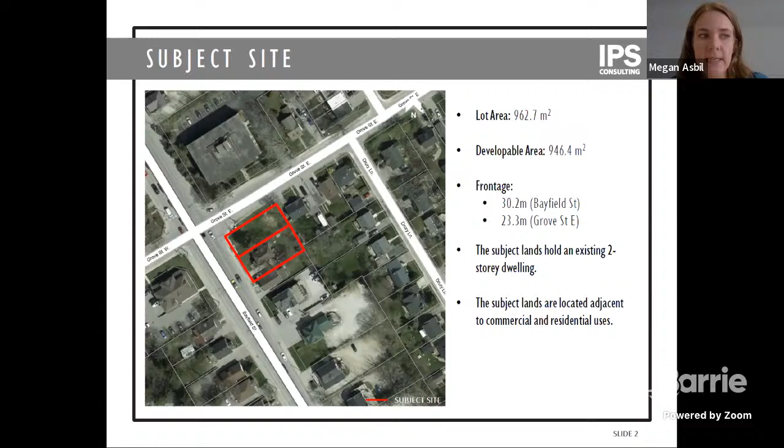233 Bayfield Street is vacant, and 219 Bayfield contains an existing two-story single detached dwelling, which is proposed to be maintained and converted for commercial use. The land slopes from north to south and contains vegetation throughout, but generally towards the east property line.

The subject lands are designated city center in the city's official plan. 233 Bayfield is currently zoned Transition Center Commercial SP-57, while 219 Bayfield is zoned Residential Multiple Dwelling Second Density in the city's zoning bylaw.

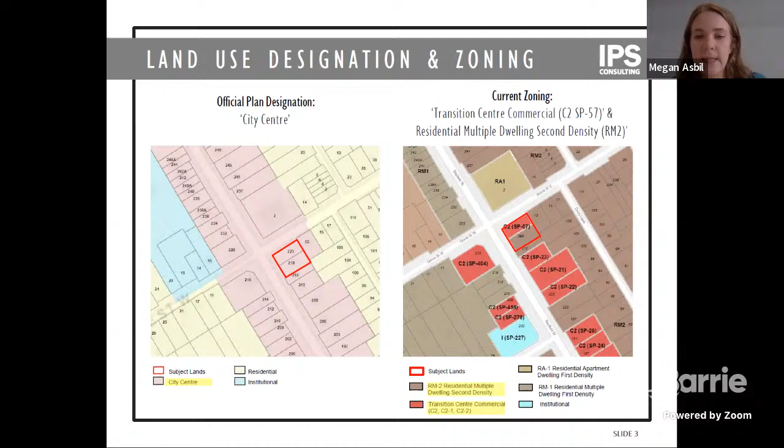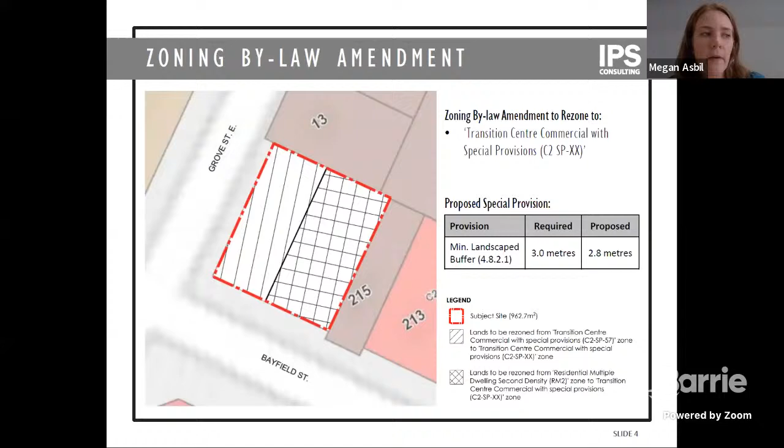The image shows the proposed zoning amendment. The proposal seeks to rezone the entire land holdings to Transition Center Commercial with Special Provision Zone, to permit conversion of the existing dwelling to commercial use as a real estate office. The special provision proposed is for a reduced minimum landscape buffer adjacent to a residential zone of 2.8 meters where 3 meters is required.

As a result of the required parking and access location, the landscape buffer along the east property is reduced to a minimum of 2.8 meters where 3 meters is required. The reduced landscape buffer is a result of our intention to maximize the distance of the entrance from Bayfield Street.

A neighborhood meeting was held on May 4th, 2021, with 9 members of the public in attendance. At the time of the neighborhood meeting, parking was proposed to the rear of the building, and parking has since been moved to the side and along Grove Street as a result of engineering considerations to provide for adequate stormwater management. During the neighborhood meeting, major items identified were related to traffic and the intended use.

A traffic impact study has since been submitted and is with the city for review, and it addresses any traffic concerns. The intended use is for a real estate office. Additional reports and studies were also submitted in support of this application, which include the traffic impact study, a tree preservation plan, a functional servicing report, and a planning justification report.

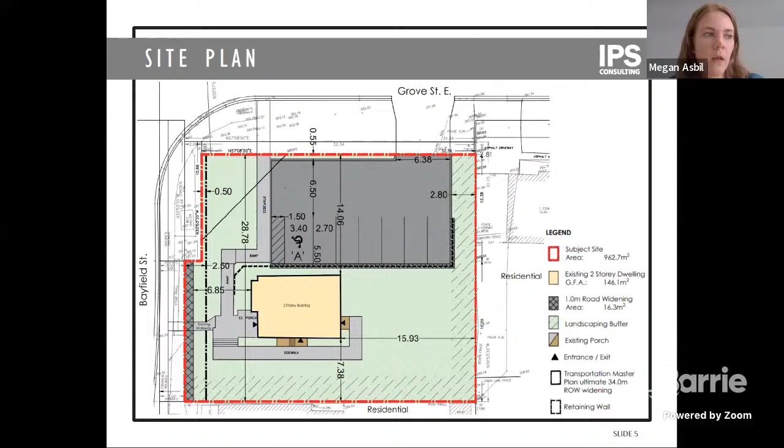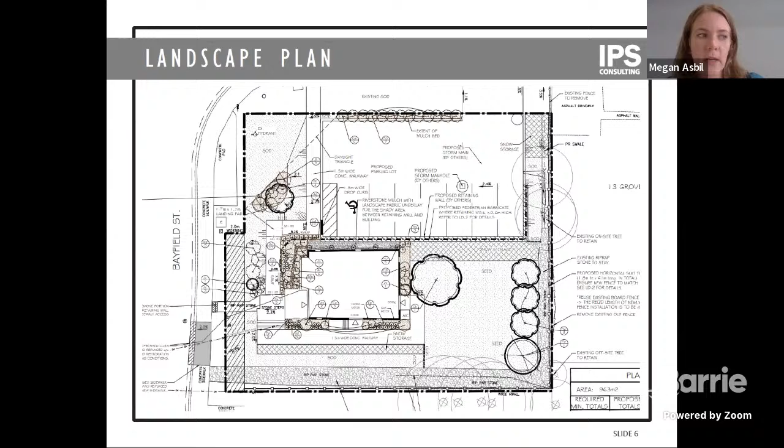This slide shows a proposed landscape plan. Additional tree plantings and vegetation have been added to the site to enhance the existing landscape elements and to contribute to the buffer between adjacent residential uses. The plan also provides a conceptual snow storage area and accommodates the required daylighting triangle at Bayfield and Grove Street.

In conclusion, the proposal will facilitate the adaptive reuse of the existing dwelling to a commercial use in the form of a real estate office. The proposed rezoning to Transition Center Commercial reflects a city center designation and the neighboring Transition Center Commercial zones. The proposed application aligns and conforms with the provincial policies on land use patterns and further conforms with the policies of the City of Barrie official plan. It is our opinion that the proposed application represents good planning and is in the public interest.

This concludes my presentation. I'd be happy to take any questions and hear any comments at this time. Thank you.

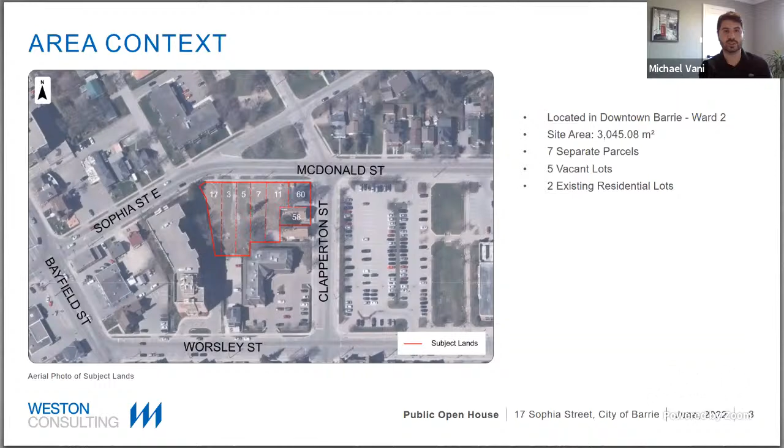So the site is located at the southwest corner of Clapperton and McDonald Street. It consists of 7 parcels currently - you can see them on the screen: 17 Sophia, 3 to 11 McDonald, and 58 and 60 Clapperton. The 2 parcels along Clapperton consist of existing residential lots, while 17 Sophia and 3 to 11 McDonald are currently vacant. The site is located within the downtown area, and it's separated from the stable residential areas to the north by Lions Park and the configuration of the McDonald and Sophia intersections here.

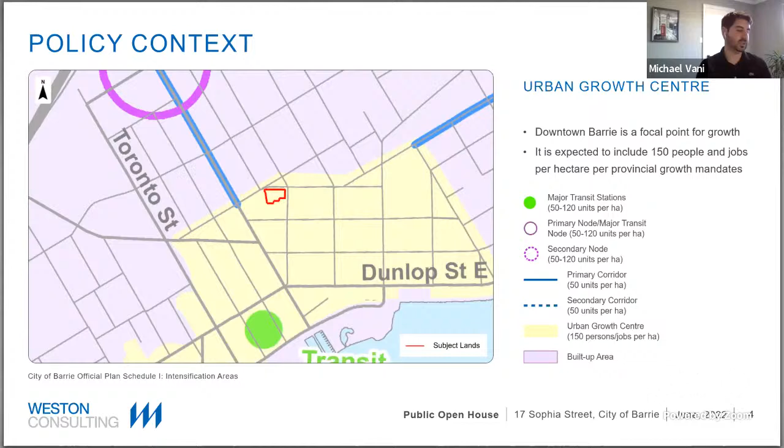So the site is located within the urban growth center, more commonly referred to as the downtown Barrie area, which mandates densities of 150 persons and jobs per hectare per the provincial growth plan policies. The City of Barrie official plan presently in force designates the site as city center. This designation generally permits a range and mix of uses, mostly in a combination of medium to high density built forms, and is expected to accommodate the greatest heights and densities in the city. The official plan provides the overarching land use vision for the city, and the development proposal currently conforms to the Barrie official plan.

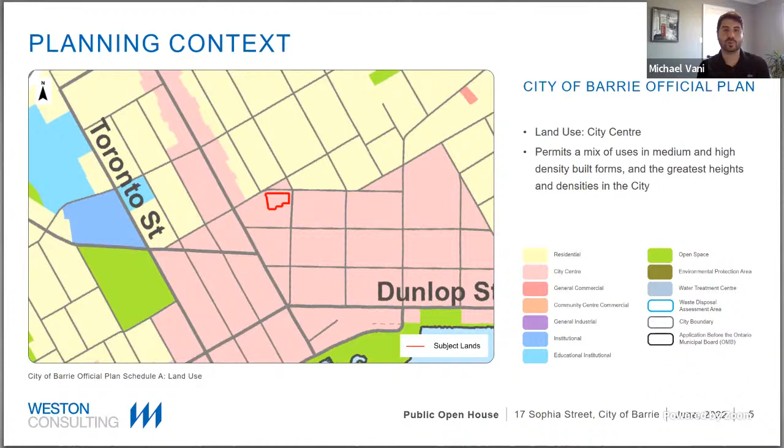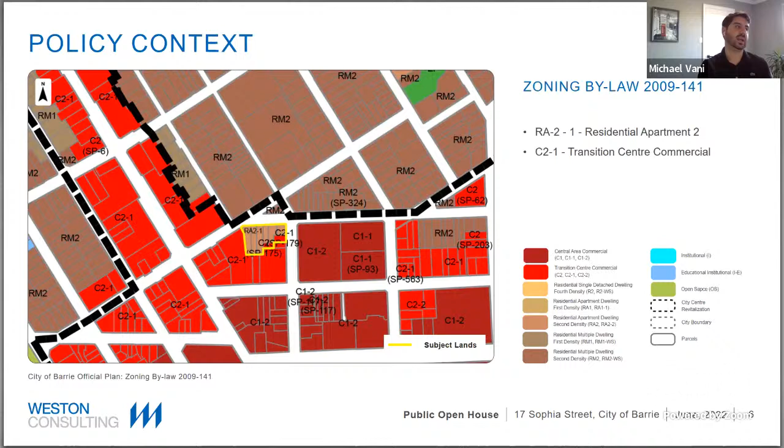With respect to the zoning, the city's zoning bylaw zones the site as RA2-1, residential apartment 2, and C2-1, the transition center commercial zone. The transition center commercial zone also applies to 58 Clapperton and the southern portions of 7 and 11 McDonald, as you can see on the graphic here.

So now I guess the good stuff, the development proposal before you. The applications propose a 21-story mixed-use building, which will consist of 253 residential units, 2,761 square meter commercial space at the ground floor, adjacent to the Clapperton and McDonald intersection.

The building facade will be designed to include a mix of glass, stone, and masonry materials. The masonry is predominantly proposed for the 4-story podium, and that's to distinguish it from the tower above.

The range of unit sizes and types are also proposed within the building to diversify the housing opportunities in the area and increase the overall housing supply for a range of family types. The building includes a mix of bachelors, 1 beds plus dens, 2 beds plus dens, and 3-bedroom units, so a wide range of units that generally fall within a 650 to 700 square foot range overall, on an average basis.

The development also includes a parking supply of 216 spaces, which is currently at a ratio of 0.85 spaces per unit, and that's proposed to be located within 3 levels of underground parking, as well as some vehicle parking at grade that is screened along the western portion of the site.

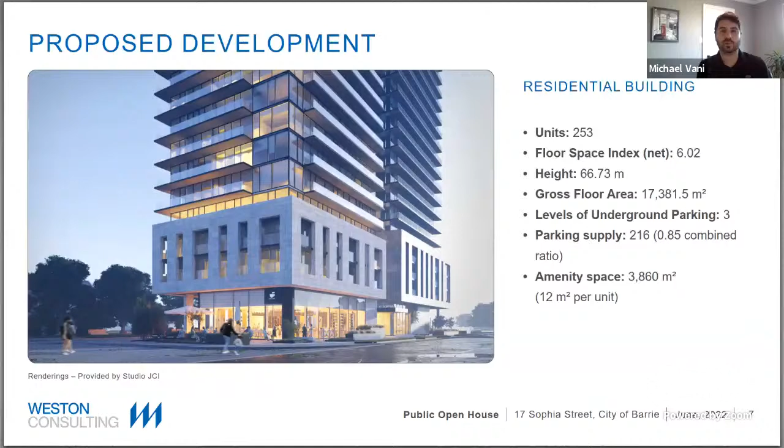In addition to that, there's also 12 square meters per unit of amenity space, which comes out to a little over 3,800 square meters overall of amenity space within the entire site, and an overall floor space index of 6.02.

So on the screen before you is the site plan, but more specifically, it is the ground floor portion of the site plan, just to give you a little bit more of an idea as to how the building will function. The access to the site has been proposed to be off of Clapperton Street based on direction from city staff and through various discussions that happened prior to the application being submitted.

This access is to provide more safety along Sophia and McDonald, and as well provides better traffic flow within the downtown area. The access off of Clapperton leads internal to the site, where there are some barrier-free and visitor parking spaces at grade, as well as an underground parking ramp that leads to 3 levels of underground parking.

There's also a loading space at the rear of the building. On the site, there are two main entrances to the building, one being off of Sophia and McDonald to increase the streetscape presence of the building and animate that streetscape in public realm.

There's also another access at the rear for more of a functionality purpose for those that are parking or visiting the site, as well as for drop-offs.

The building does include various amenities at grade, as well as commercial space that is proposed along the McDonald and Clapperton frontages, as well as approximately 170 square meters of outdoor amenity and urban square that is proposed at the corner of Clapperton and McDonald.

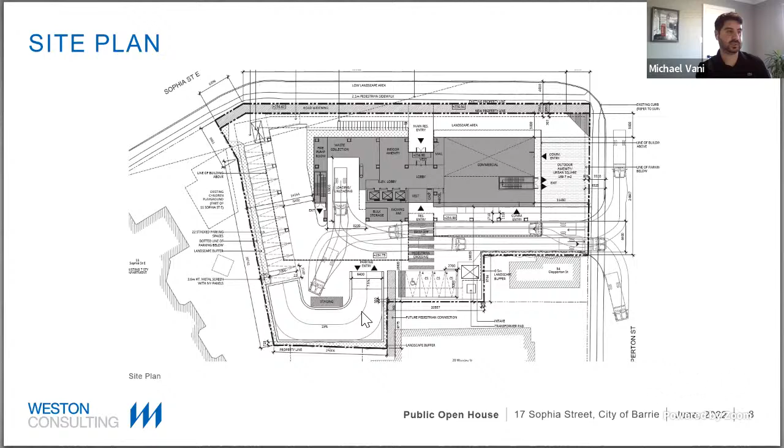So on the screen right now are a few conceptual renderings of the public square and open space that's proposed at the corner. Through the design process and in consultation with city staff, we saw the potential of a great community benefit here and a bit of a gateway feature into the downtown area.

As part of the development application, we are proposing the 170 square meters of urban square that will be open to the public but privately owned. We are excited about this feature and see it as a gathering place, not only for the community, but for the future residents of the building.

The rendering shown are preliminary, but we envision the space to include various street amenities such as bike parking, benches, tables, as well as extensive landscape treatments. The primary entrance to the commercial space is also located off of the urban square, which we believe will assist in animating and activating the space, as well as providing a great opportunity for that commercial viability of that unit.

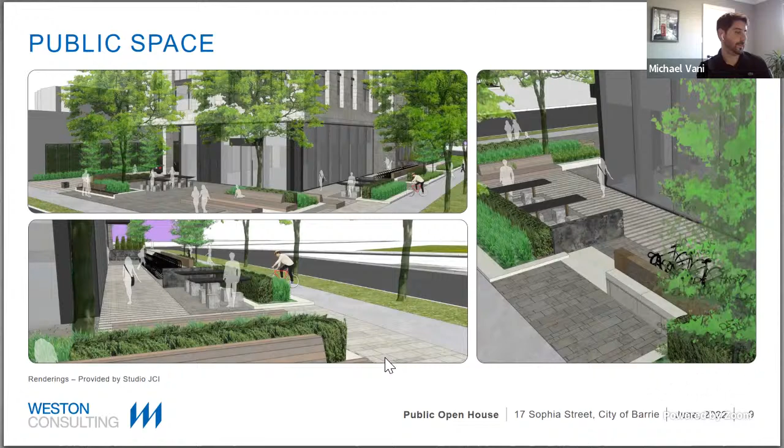Now on the screen is a bit more of articulation around other aspects of the building and some of the landscape and streetscape improvements that the plan hopes to bring. In addition to the public square, the team has put a lot of thought into the overall streetscape plan and the vision for the public realm.

Generous plantings and landscape elements are proposed to animate the streetscape and improve the pedestrian experience along Clapperton, as well as on McDonald and Sophia. As I said previously, the main building entry is also located off of Sophia and McDonald to further animate that streetscape.

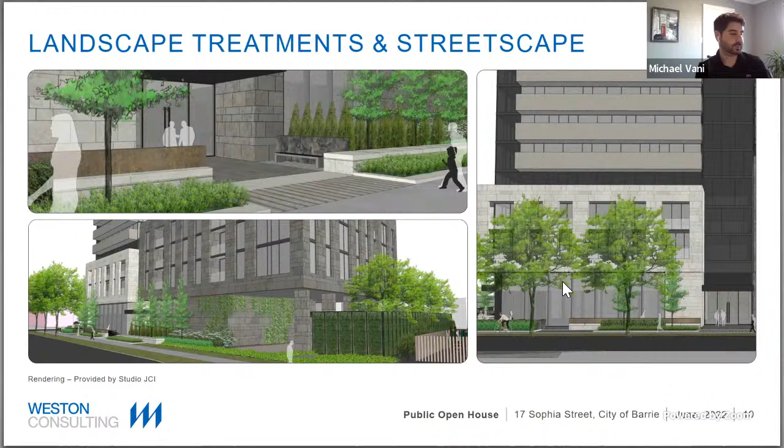The application before you this evening seeks to amend the existing transition center commercial zoning and apply it to the entirety of the lands with site-specific provisions. This is to implement the development application as currently proposed. There are a number of site-specific provisions that will need to be implemented through that process, such as reductions in the side yard setback, increases to the building height and gross density, a slight reduction in the parking requirement, and a reduction in the overall commercial ratio to the ultimate GFA. We are still awaiting feedback from zoning staff and will continue to refine this list of amendments as we proceed through the application process.

In terms of next steps, we have already had a public open house prior to the submission of our application, where we received a lot of positive feedback from the community, which we are still considering in our refinements to this plan. We wish to hear some additional feedback this evening from council, as well as from any members of the public in attendance, to take that back and consider further refinements to our plan. We are still awaiting a number of comments from city departments and external agencies, and we'll be reviewing any comments we receive tonight against those to potentially make further refinements and address all issues so the application can be brought forward to this committee for further consideration in the future.

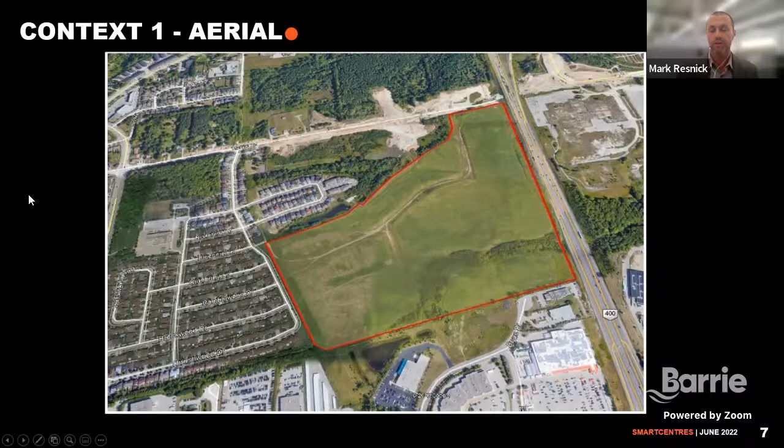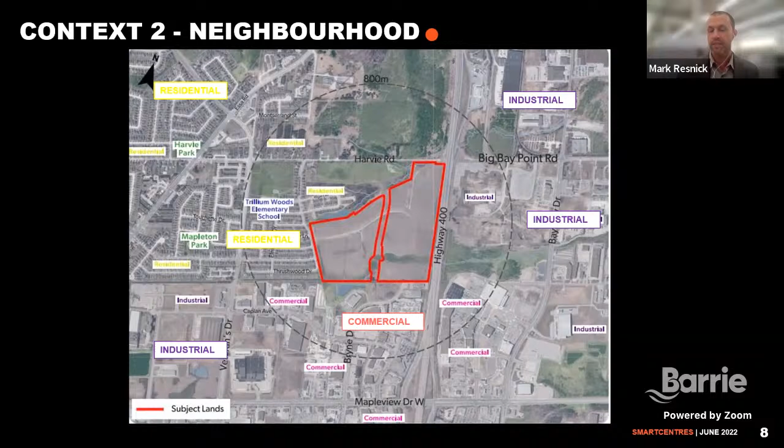For a little more context panned out, you can see surrounding the property is generally industrial uses to the east, commercial to the south, and residential to the north and west.

A little bit about the planning context. Under the current official plan, the property has a split designation with industrial on the west, commercial on the east, and open space and environmental protection designations around the Lovers and Whiskey Creek.

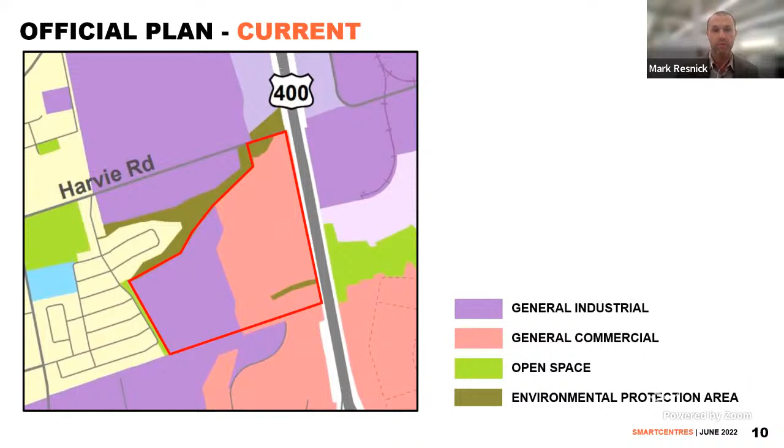Under the proposed official plan, which has been approved and endorsed by council and is before the province for approval, the property has been adjusted to residential with neighborhood designation on the west and employment designation on the east, carrying forward the environmental protection designations. Our proposal tonight is aligned with and implements these new official plan designations.

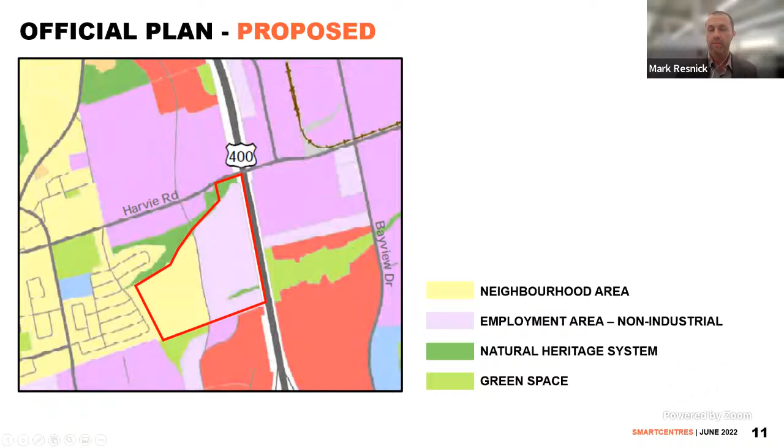The zoning bylaw aligns to the current, old official plan designations, with industrial zoning for the west half and commercial zoning for the east half. I would point out that inherent within the C4 zone are some residential permissions.

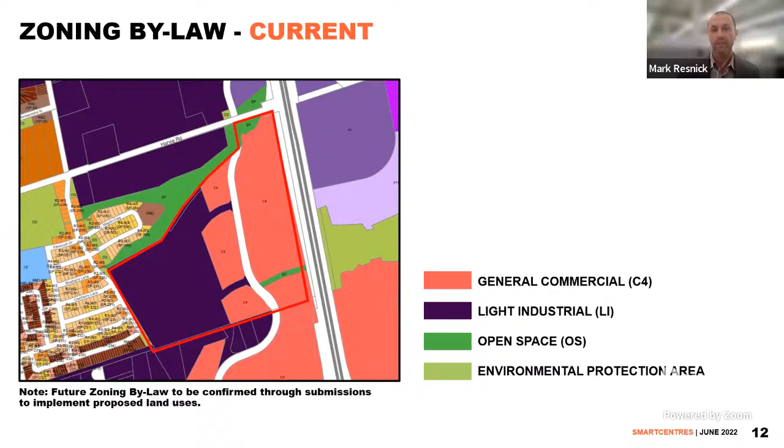Now for the project. We're here tonight to debate site-specific applications for an official plan amendment, a zoning bylaw amendment, and a draft plan of subdivision.

The proposed development, which I'll put up on the screen in a moment, proposes on the west portion of the property a residential community with low-rise and mid-rise built forms, a community park, storm pond, and open space. The eastern portion of the property is proposed to be employment uses, storm pond, and open space.

The divide of the property between west and east is created by the future Bryne Drive, which has been dedicated to the City of Barrie and is now seeking permits and final approvals, with construction anticipated to commence this year and completion by 2024.

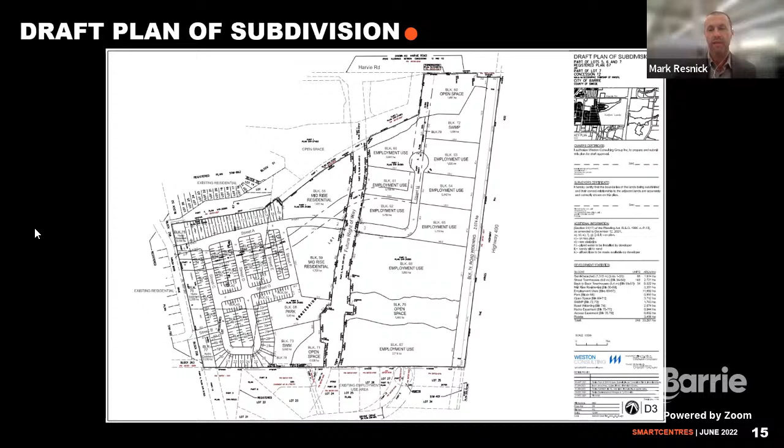The plan up on the screen is the draft plan of subdivision that has been submitted to the city with our applications. For discussion, I've put on the screen a simplified version that is probably easier to view.

As you can see, the Bryne Drive extension proposes through the middle of the property as a transportation spine that connects the proposed development to the balance of the city of Barrie's road network, better connecting the property to the city. Bryne Drive will have multimodal opportunities for cars, bikes, and future transit routes, and full municipal services.

West of Bryne, the proposed residential community includes low to mid-rise residential forms: semi-detached townhouses, back-to-back townhouses, and mid-rise apartment blocks proposed between 4 and 6 stories.

The residential community has been laid out with a transition of density, with higher density forms towards the future Bryne Drive right-of-way. Protections for Lovers Creek and Whiskey Creek have been put in place with enlarged setbacks to protect the creeks.

The existing utility corridor on the west side of the property along Thrushwood Drive will remain. A new public park, storm pond, and open space have been grouped together to create an outdoor community amenity. The draft plan proposes 248 low-rise units, 2 mid-rise blocks, and is expected to be phased in construction.

East of Bryne is proposed for employment lands to capitalize on the highway visibility and the new enhanced access created by Bryne Drive. Generally, we would expect the lands to develop with 1 to 2 story employment buildings and the open space and storm pond block.

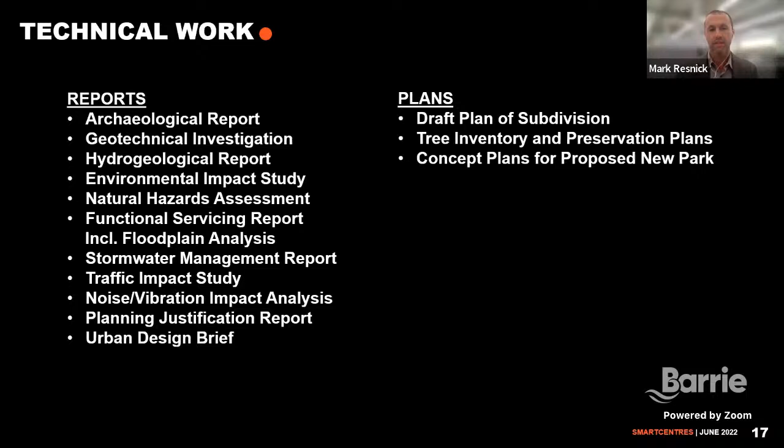This is the beginning of the approvals process and the end of the presentation. The plans will be adjusted in the future based on input from the circulation comments received from the commenting agencies. The review process should ensure that the plan adheres to the policies of the City of Barrie.

The unit mix is something we've studied and feel meets market demand and proposes more attainable forms of housing. The semi-detached and townhouses we feel are appropriate for the proposal and reflective of the adjacent community that, while predominantly singles, does have on Bentley Crescent, Thrushwood Drive, and Megan Crescent existing townhouses and semi-detached forms. In our view, the proposed densities are in keeping with the official plan and the density ranges established within it, and the permissions for up to 6-story forms of residential development closer to arterial roads like Bryne Drive. The proposal will assist Barrie to achieve its intensification targets set by the province, and subject to refinement of the number of apartments through future site plan applications, we have a rough estimate that the overall density is in the order of 60 units per hectare, which is appropriate for a neighborhood designation.

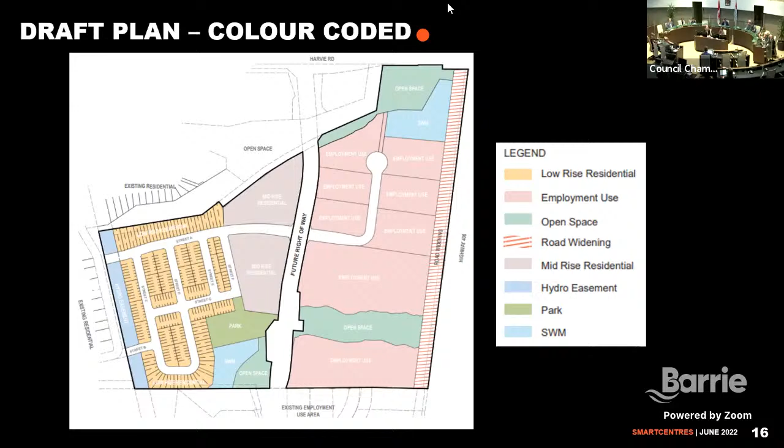Thanks, Mr. Resnick. I'll call on Celeste Kitsimetry, our senior planner, to give us an update on the status of this application. Good evening, Mayor Lehman, members of Planning Committee and the public. Further to Mr. Resnick's presentation and the memorandum provided to the Planning Committee by staff, I will provide an update regarding the status of the application and the preliminary planning and land use matters being considered.

As outlined in Mr. Resnick's presentation, a neighborhood meeting was held virtually on January 12th. I won't go into great detail about the meeting, as a number of questions were answered by Mr. Resnick in his presentation. I will just note it was well attended, with 47 attendees including Ward 7 Councillor Gary Harvey, planning staff, and SmartCentres and members of their consulting team. Residents provided comments regarding a number of matters as noted in the presentation, primarily with regards to the proposed density, increase in traffic, the timing for the Bryne Drive extension, archaeological considerations, and the capacity of local schools.

The application is currently under review by planning staff and the city's technical review team, and external agencies such as Lake Simcoe Region Conservation and the Ministry of Transportation. An analysis of the application will be provided at a later date when the staff report is brought forward to Planning Committee.